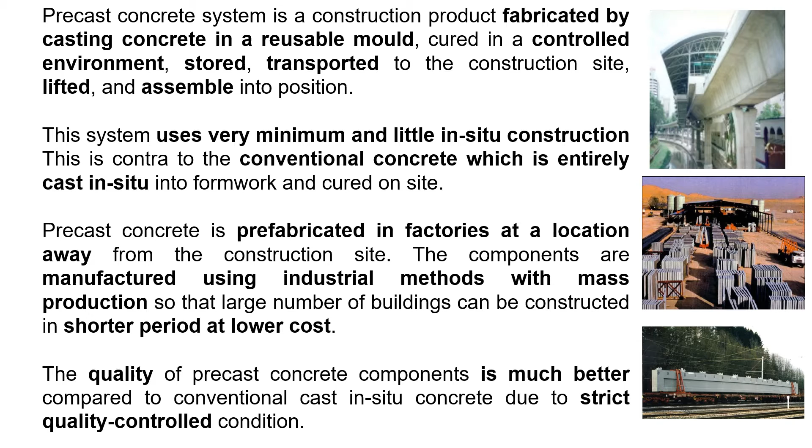Finally, the quality of precast concrete components is much better compared to conventional cast in situ concrete due to strict quality control. Because the components are fabricated at a factory, strict quality control can be imposed and applied to the product. Therefore a much better quality of product can be produced.

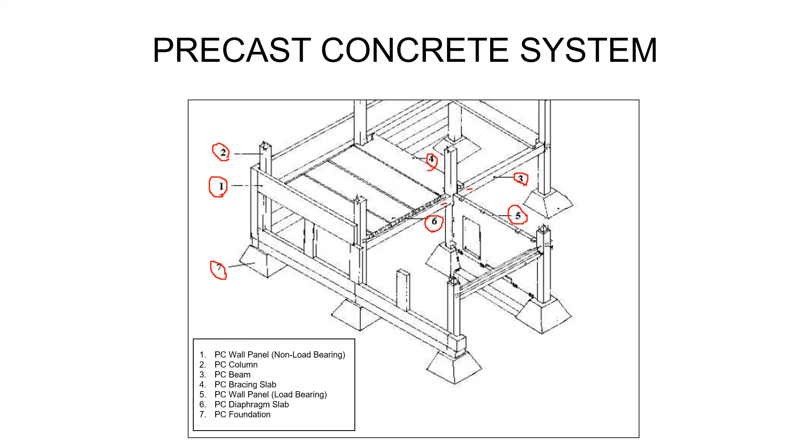Precast concrete system provides a number of advantages. Number one, precast concrete is cast off-site. The process to produce precast concrete can be done in a factory. Therefore, you don't have to bring all the raw materials to the construction site for the concreting process.

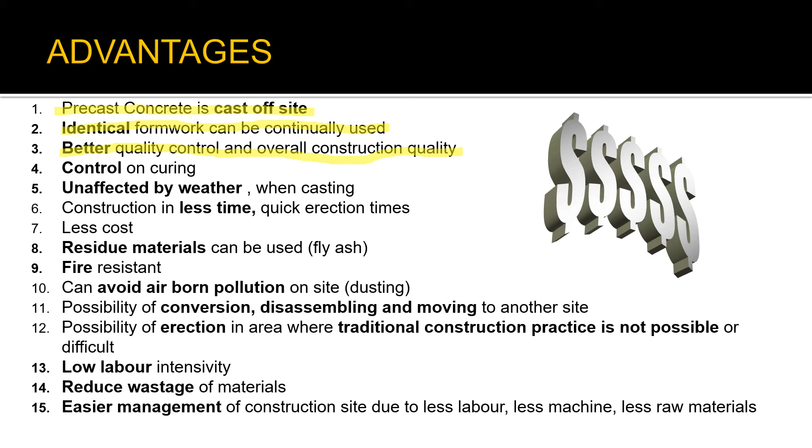Number two, identical formwork can be continually used. Because formworks are made from steel, they can be used continually as long as the condition is good. Number three, better quality control and overall construction quality. Precast concretes are normally produced in a factory, and factories have good quality control procedures, good machines, and good skilled workers, which contribute to the overall construction quality of the product.

Number four, control on curing. Because precast concretes are produced in a factory, the curing process can be controlled, such as by using autoclave machines. Autoclave machines use steam to cure the concrete. Therefore, the temperature can be controlled and the time taken for the curing process can be controlled as well.

Number five, unaffected by weather. The casting process of precast concrete is done in a factory. Therefore, it is not subjected to any climate or weather disturbance.

Number six, construction in less time. The process of casting precast concrete is done in a factory. Therefore, the only process left at the construction site is erection, and this can be done very quickly.

Number seven, less cost. Because all the production of precast concrete is done at a factory, there is less labor involved at the construction site and less wastage of materials. Number eight, residue materials can be used.

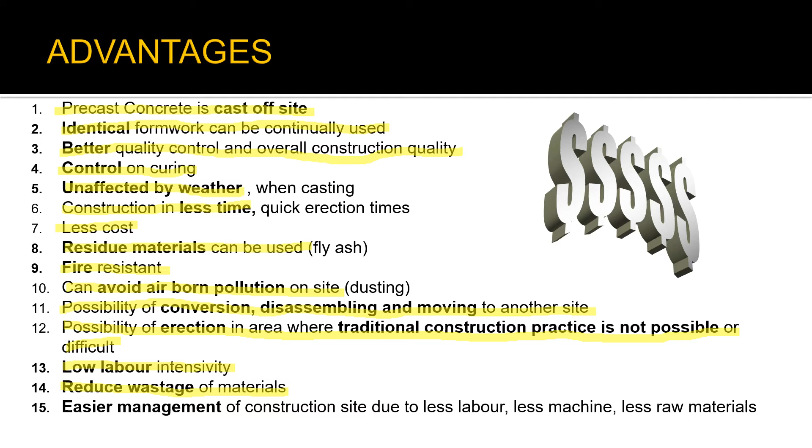Number 15, easier management of construction site due to less labor, less machine, and less raw material. The only activities that require supervision at construction sites are the erections of the components.

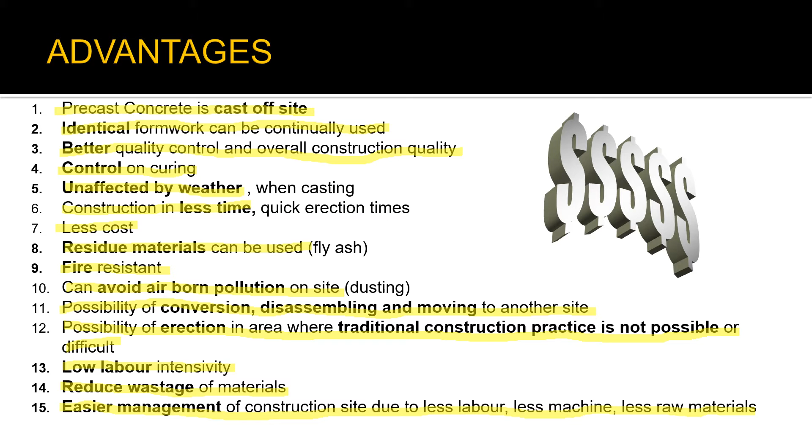However, precast concrete system comes with disadvantages. Number one, transportation is costly. This is due to the large components. For small projects, the transportation cost is going to be very high.

Number two, transportation and erection need to be designed in detail. Before producing any precast concrete, the erection methods and transportation journey need to be studied in advance.

Number three, required different site or location or storage for its production. Precast concrete system requires a dedicated location for its permanent factory or temporary factory.

Number 4, very heavy members or components. Precast concrete components, normally large in size, result in heavy weight.

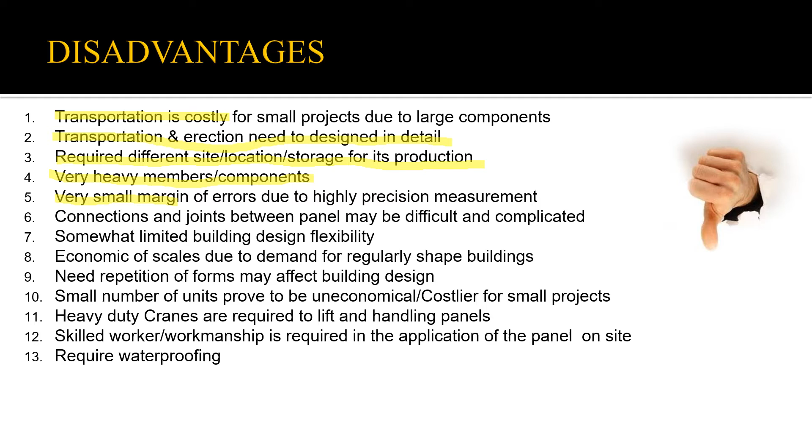Number 5, very small margin of errors due to highly precision measurement. Precast concrete system needs to be produced with highly precise measurement, otherwise it cannot fit during the installation.

Number 6, connection joints between panels may be difficult and complicated. In precast concrete system, the connections and joints are not simple. They are very complicated.

Number 7, somewhat limited building design flexibility. In precast concrete system, the shape and designs are based on the formwork, and this limits the flexibility.

Number 8, economy of scale due to demand for regularly shaped buildings. Economy of scale can only be achieved if regularly shaped buildings are used.

Number 9, need repetition of forms may affect building design. Because of the repetitive use of formworks, the building design cannot be varied.

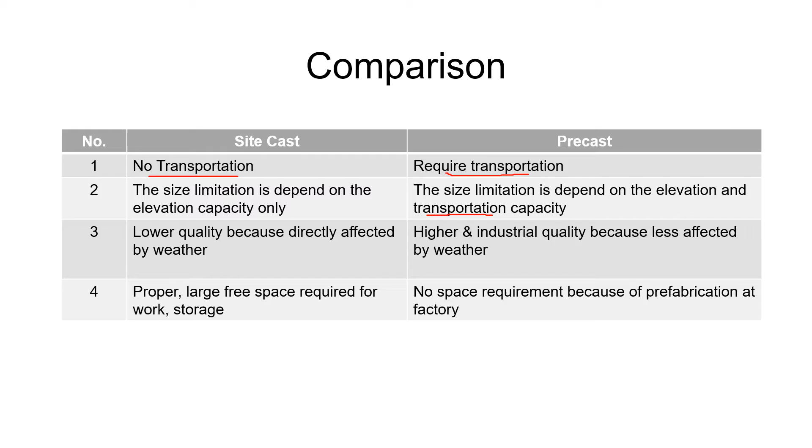The design concept of precast concrete building is based on three factors. Number one, buildability: the component shapes and design must be possible to build using the available formwork system in the factory. Number two, economic: a huge amount of capital needs to be invested to set up factories, machines and workers, therefore a large scale of project is required to ensure return on investment or profit. Number three is standardization: all components fabricated need to come in standard size to achieve buildability and economy.

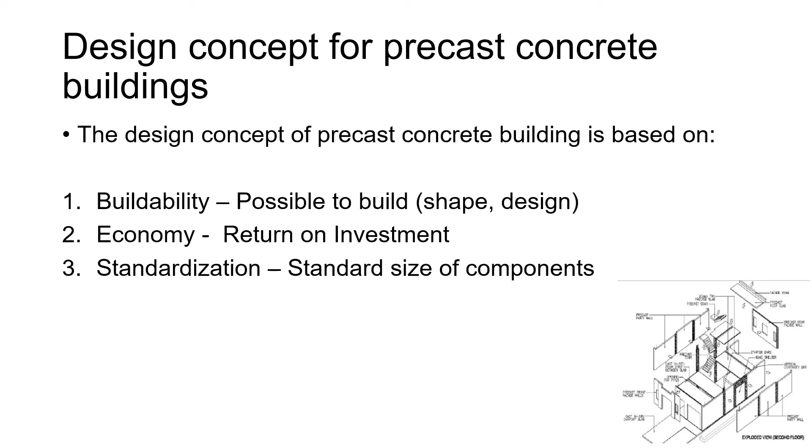Because concrete components are normally large in size and very heavy, it requires equipment and tools for handling, lifting and installing, such as mobile crane for lower story of building and tower crane for higher story of building. And those cranes must come with lifting tools such as spreader beams or wire rope slings to lift the components from the transporter to the locations.

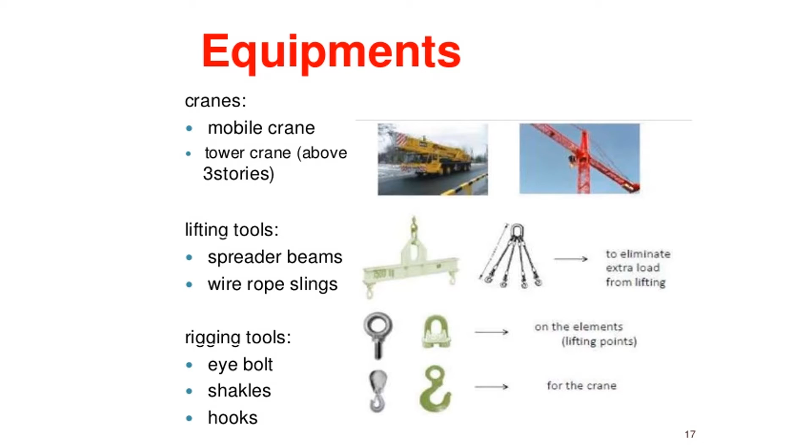And rigging tools need to be properly located within the components, such as eyebolt, shackles, and hooks. This is to facilitate the lifting and handling process.

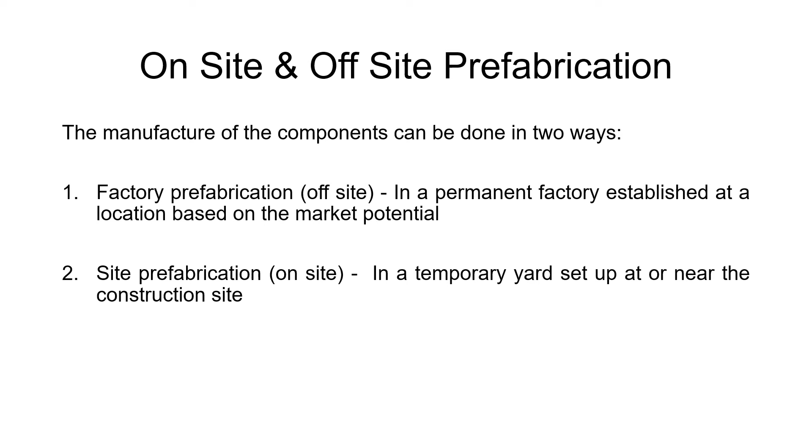The manufacturing of precast concrete components can be done in two ways. Number one is by factory prefabrication off site. This method requires a permanent factory to be set up at a location surrounded by ongoing construction projects, so the factory has the opportunity to supply all the precast concrete components and generate income. Number two is by site prefabrication on site, and this method requires a temporary yard to be set up within or near the construction site for the prefabrication process.

For factory prefabrication, standardized components can be produced on a long-term basis because the factory is permanent, and the work can be done throughout the year without interruption by climate or weather. Because of this, a high level of mechanization, or full use of machine, can be achieved.

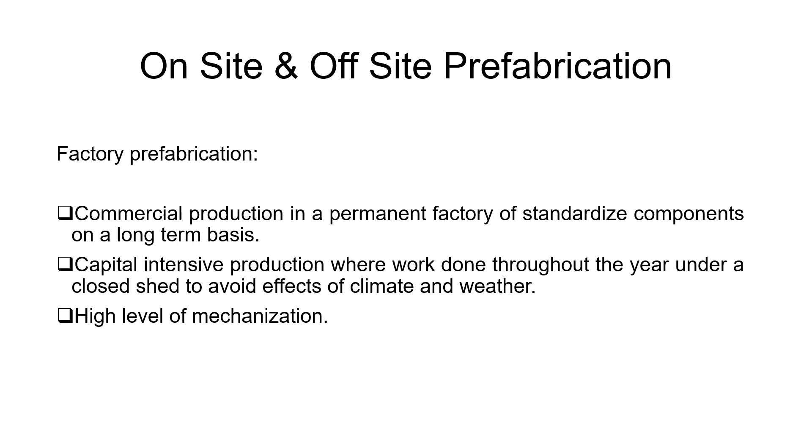For site prefabrication, it requires a temporary yard to be set up within the site, or as near as possible to the site, probably not too far. This system is used when it involves a specific job, and that job is only for a certain period of time. The execution normally consists of two methods.

First is semi-mechanized. In this method, works are carried out in open space without shed, and the labor is locally outsourced. This system also uses minor equipment and a few molds or formworks. Second is fully mechanized. This system is carried out under a fully shed or covered area, and all the labor is skilled, and the equipment is similar to the equipment used in factory production.

Precast concrete components. There are various precast concrete components available, and they can be assembled, connected and joined with one another to form a complete building or structure.

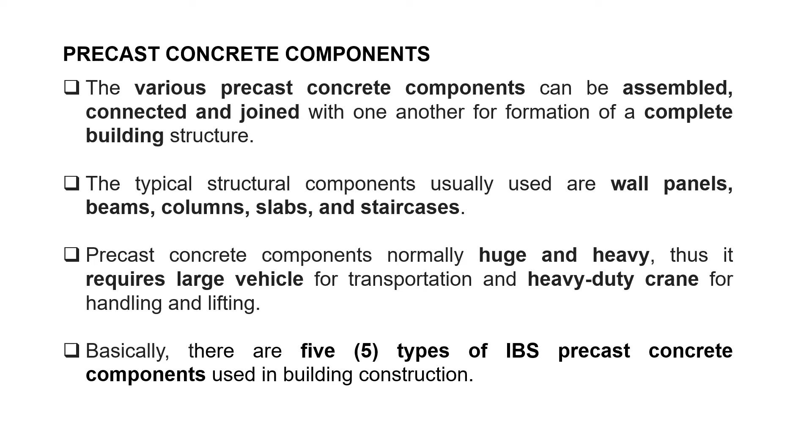Basically, there are 5 types of IBS precast concrete components. Number 1, precast concrete slab. Precast concrete slab is the horizontal structural member because it is installed in a horizontal orientation. It is normally used for floor slab and roof decks and can be designed as one-way or two-way slab.

Normally, precast concrete slabs come in half and act or function as a formwork, when cast in situ concrete is formed on the top parts of the precast concrete slab. It can also be integrated and connected with other precast or in situ components such as beams and walls.

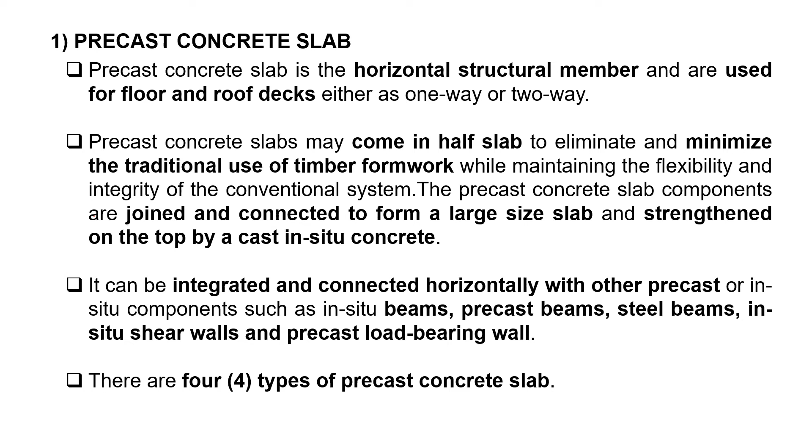There are 4 types of precast concrete slab. Number 1 is solid flat slab. Solid flat slab is fabricated as a solid object without any hole or void.

Number 2, hollow core slabs. This type of slab is fabricated with a series of voids and hollows to incorporate insulation or any utilities such as conduits and wiring. Number 3 is double T slab, which consists of two shapes of T. And number 4 is single T, which consists of one T shape.

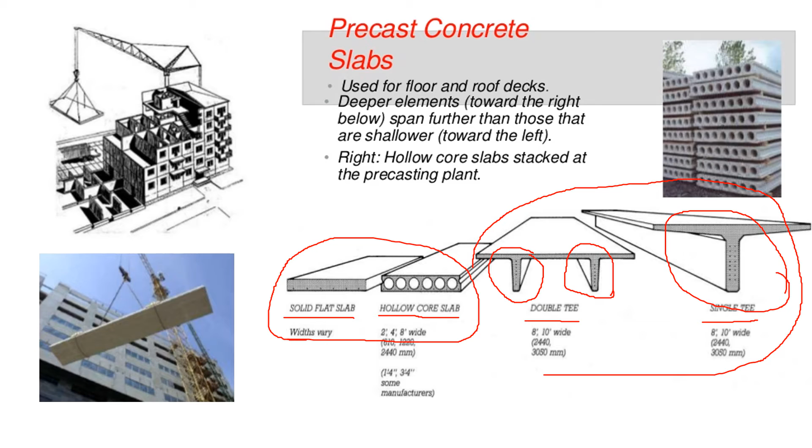Both solid flat slab and hollow core slabs are normally used for shorter span slabs. However, double T and single T are normally used for long span slabs, but with more thickness.

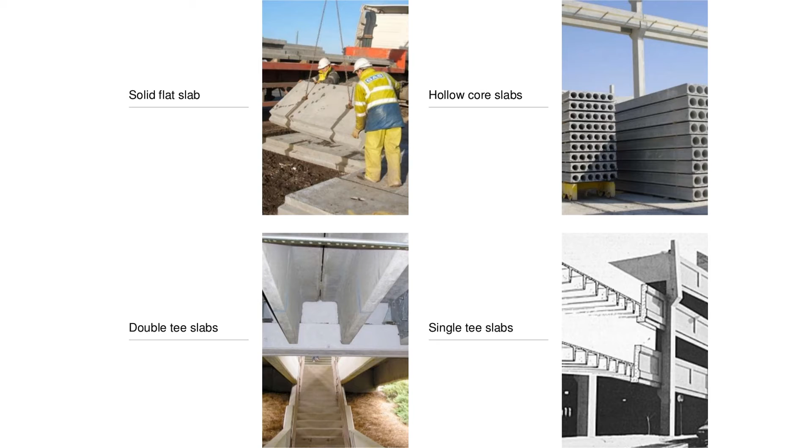These are the examples of solid flat slabs, hollow core slabs, double T slabs, and single T slabs.

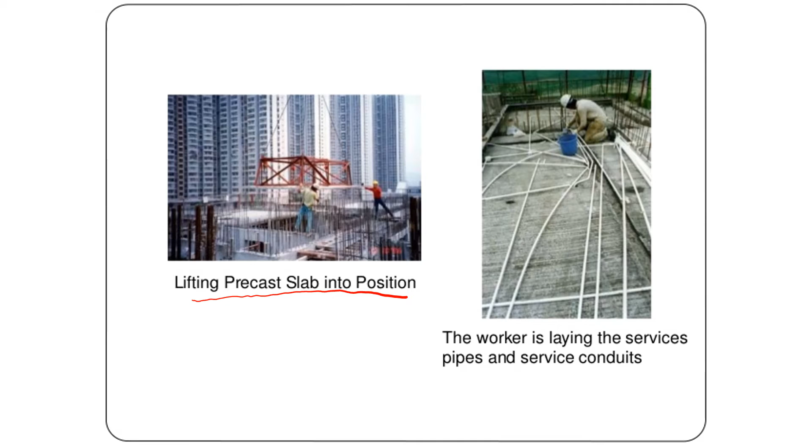This is an example of the lifting process of a precast concrete floor slab into its position, and another photo here showing a worker laying service pipes and service conduits on the precast concrete floor slab after it was installed, prior to receiving cast in situ slab on top of the precast concrete slab.

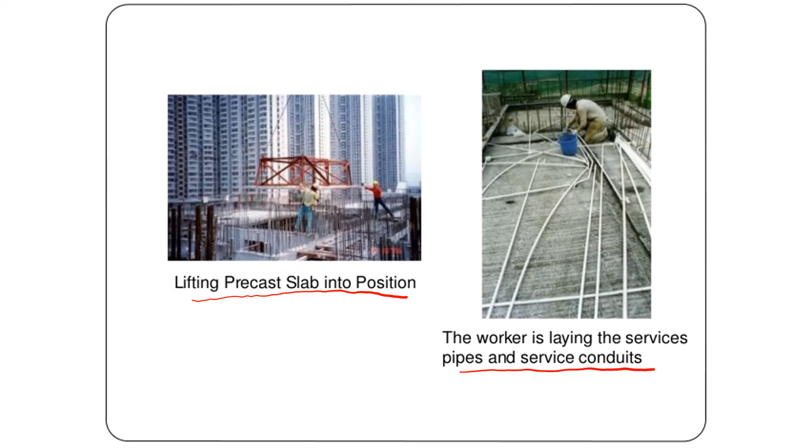Before any precast concrete slab system is selected, there are factors to be considered. Number one, maximum span. If a shorter span is required, perhaps solid flat slab and hollow core slabs are more suitable. If a longer span is needed, double T and single T slabs are more appropriate.

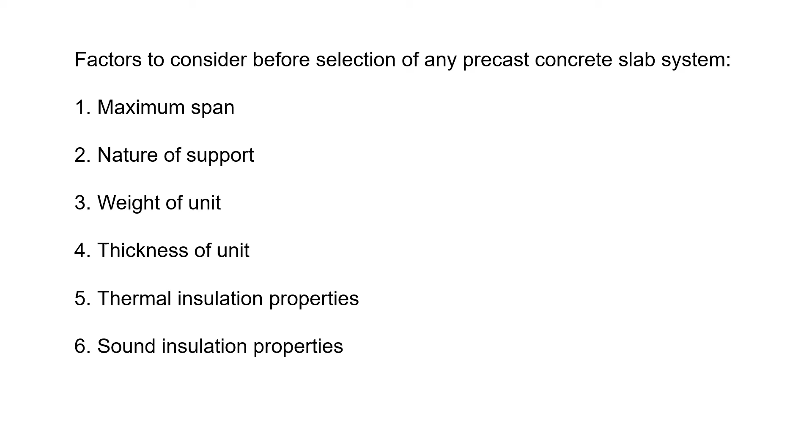If less thickness slab is required by the project, maybe double T or single T slabs are more appropriate. Number 5 is thermal insulation, and number 6 is sound insulation. If the project requires insulation to be incorporated in the floor slabs, perhaps the more appropriate system is hollow core slabs.

Number 2, precast concrete beam. Precast concrete beam is the horizontal structural member to carry flexural and shear loads, and also provide support for floor slabs, and can be made in various sizes depending on the required design and specification.

For internal beam, the cross section is symmetrical - this is to support the floor slab on both edges and sides of the beam. For external beam, the shape is asymmetrical because only one side is required to support floor slabs.

Precast concrete beams come in four normal standard shapes: rectangular, L-shaped, inverted T, and AASHTO.

Precast concrete beam is normally fabricated in standard size. This is to minimize costs and accelerate the manufacturing process.

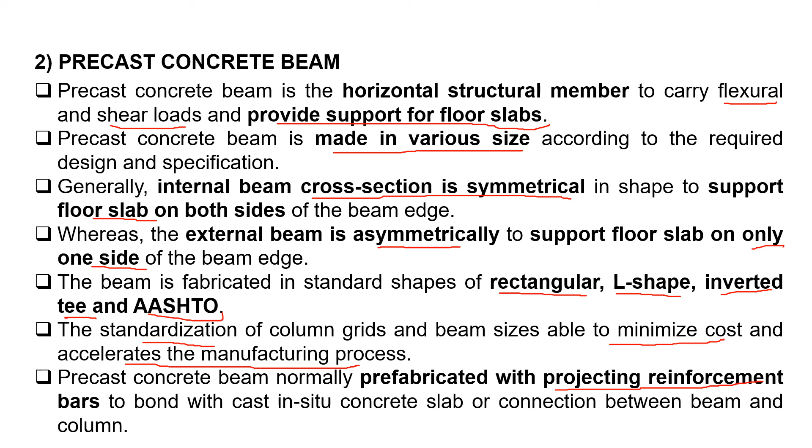Precast concrete beams provide support for slab as previously mentioned, and the precast concrete beam is provided with projecting reinforcement bar that will bond with other components. This is the examples of the projecting reinforcing bar.

And this is the four standard shapes of precast concrete beam. This is the rectangular beam. This is L-shaped beam. This is inverted T beam. This is AASHTO beam, and this is the examples of how AASHTO beams look like.

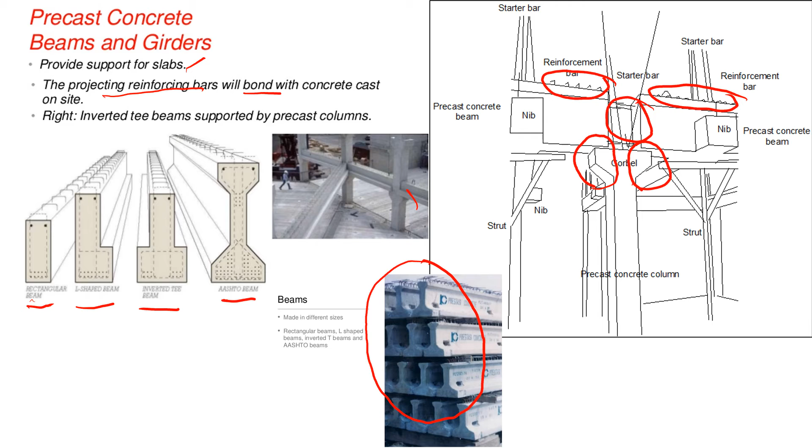The beams are supported by concrete column with connections called corbel. This is how precast concrete column supports precast concrete beam by using a connection called corbel. This is examples of corbel.

Sometimes AASHTO beam is incorporated with pre-stressing technology. This is how the reinforcement bar is arranged in AASHTO beam, in which can be seen here the main bar is located at the top parts of the beam and the bottom parts of the beam.

This is because compressions occur at the top parts and tensions occur at the lower part. Therefore, by incorporating pre-stressing technique to both parts of reinforcement bar, this could increase the strength of the beam.

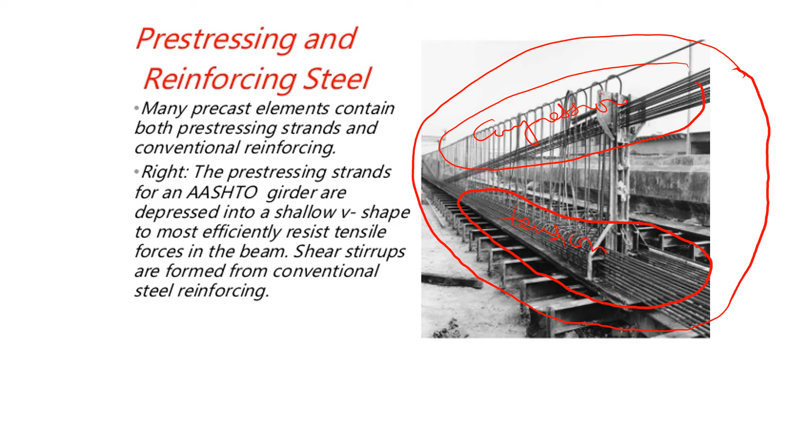Number 3 is precast concrete column. Precast concrete column is the vertical structural member used to provide support for beams. And precast concrete column usually carries axial loads or vertical loads, and is designed and manufactured either in single or double story height for the purpose of easy handling and transportation.

Columns higher or longer than single or double story may face difficulties during transportation using trailer and lifting using a crane. And the columns, even though manufactured in single or double story height, can be assembled to one another to achieve the required heights.

If a 15-story building is about to be constructed and the precast column is fabricated in a single story height, therefore the column can be connected to one another until the height is achieved.

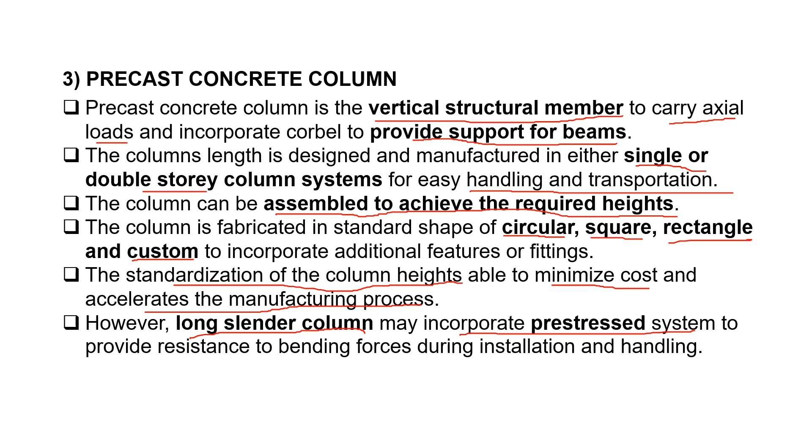However, if there is a long slender column that needs to be constructed, it may incorporate a pre-stress system in the reinforcement bar to provide more resistance to bending during installation and handling. This is the examples of precast concrete column.

During installation, push-pull prop is required as a temporary support to provide stability to the column during installation.

This is samples of detailed connections column to footing. This is the pad footing. This is the pile, and this is the precast concrete column.

So the main bar, the starter bar from pad footing, will be inserted in the hole at the bottom of the column. Then after that, a concrete grout or cement mortar will be injected into this hole to provide stiffness or strength to the connection.

This is where the grout hole is located for mortar injection or grout injection. This is examples of the higher precast concrete column.

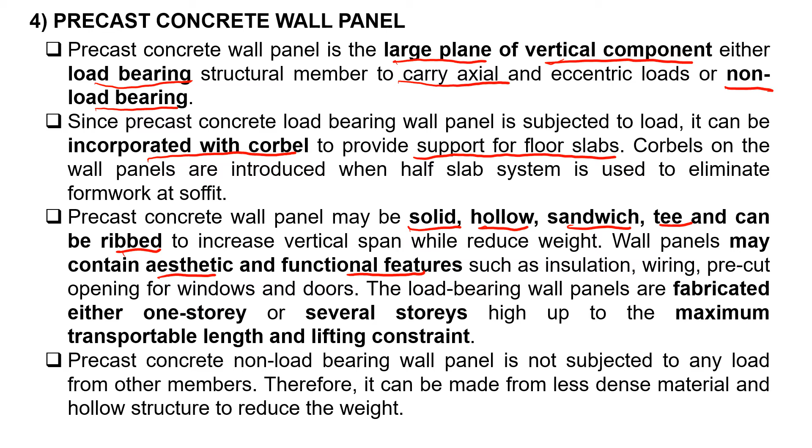Precast concrete wall panel may be fabricated as solid, hollow, sandwich, T, and rib, and may contain aesthetic and functional features during fabrication, such as insulation, wiring, windows and doors.

The wall panels can be fabricated to either one-story heights or several-story heights, as long as it does not exceed the limitations, maximums of transportable length and lifting constraints.

However, for precast concrete non-load bearing wall, it is not subjected to any load from any members. Therefore, it can be made less dense to reduce the weight.

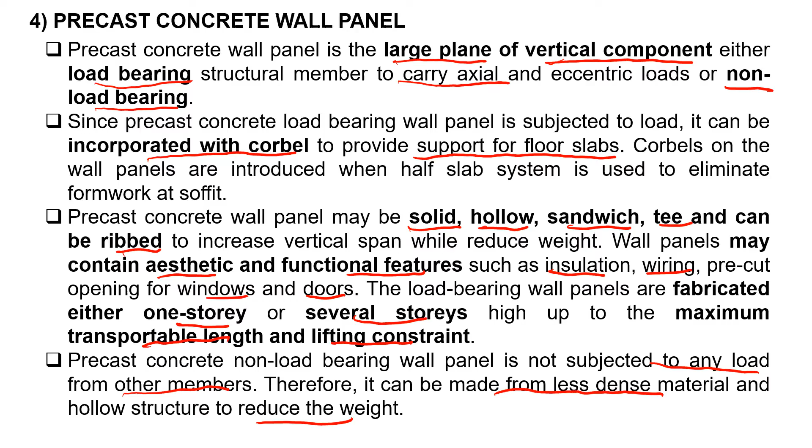This is examples of the precast concrete wall panels. As you can see here, wall panel can be fabricated up to several story height, as long as it does not exceed the limitations for transportable length and lifting capacity.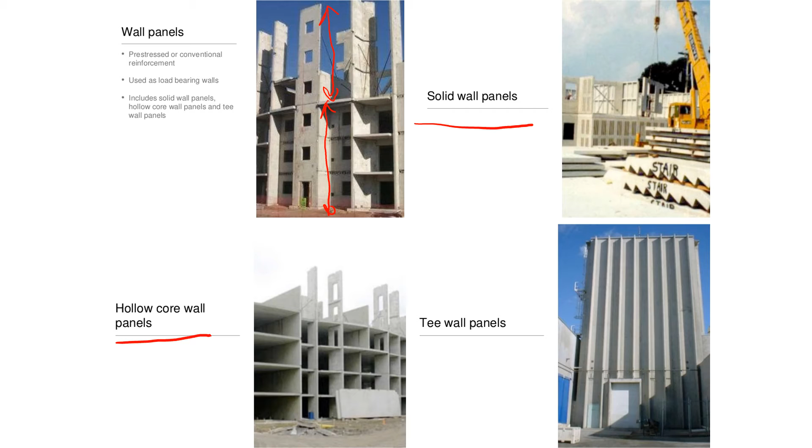This is the solid wall panel. This is the hollow core wall panels, and this is the T wall panels.

This is wall panels supported by temporary bracings. You can see here that the large size of panels is fabricated and installed, and this is how the panel is lifted by the cranes for installations.

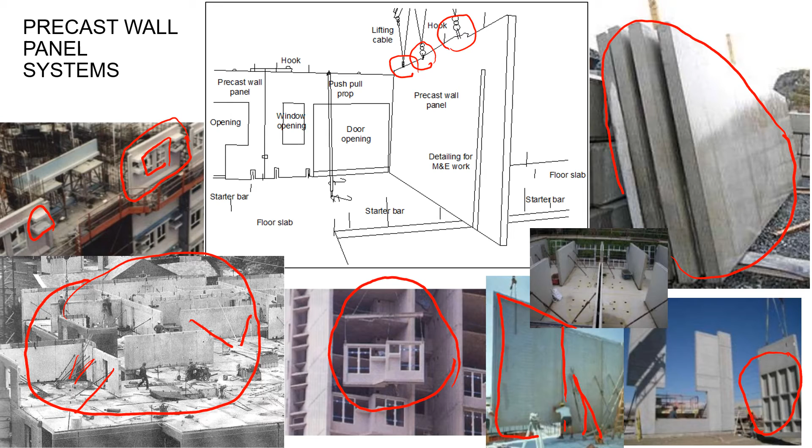The wall panel must be incorporated with hooks for the crane to lift the panel safely, and push and pull props are required as temporary bracing to support the wall panel during the installations.

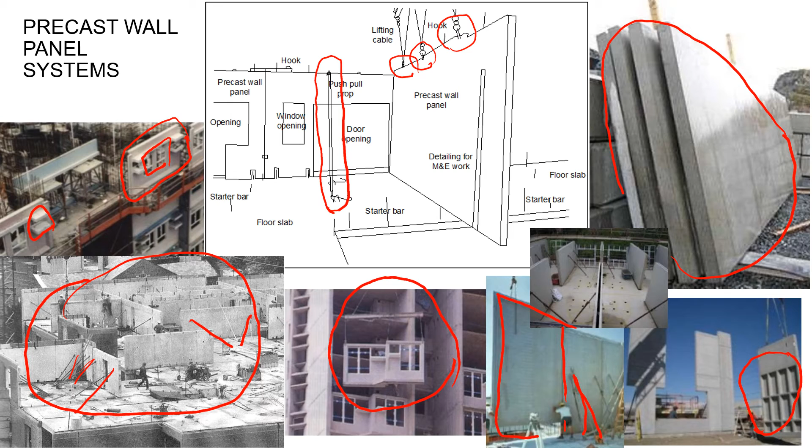In this example, you can see push and pull prop is used to provide support and stability to the precast concrete wall panel during installations.

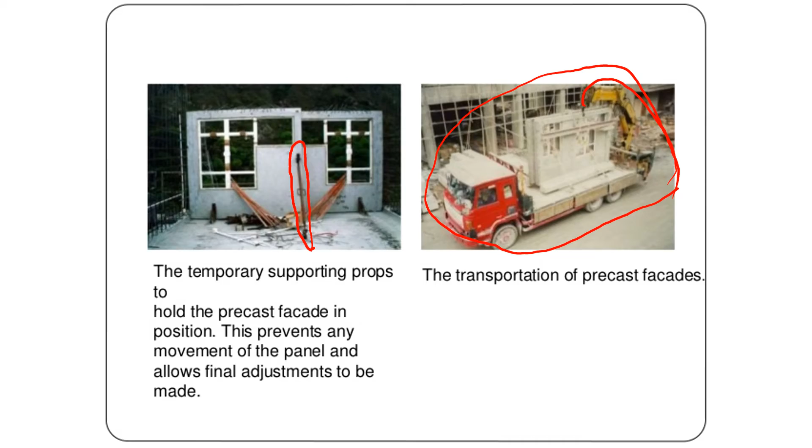Number 5, precast concrete staircase. Precast concrete staircase is an elevated structure member connected from the lower floor level to upper floor level, and can be manufactured with or without landing slab, and projecting steel is provided at the staircase for connections between landing and other components.

Smooth and quality finish can be produced because of the formworks capable of producing such smooth finish, and it was the standardization of the size, the width, the rise, the treads that makes the production economical.

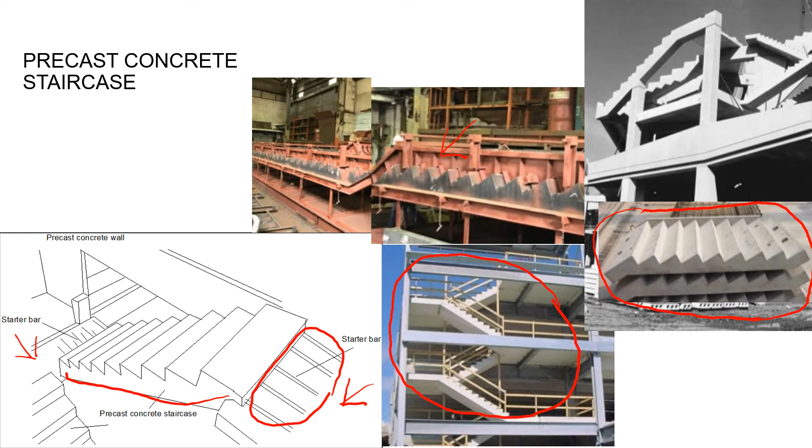Assembly concept for precast concrete building: one component is supported by other precast concrete components.

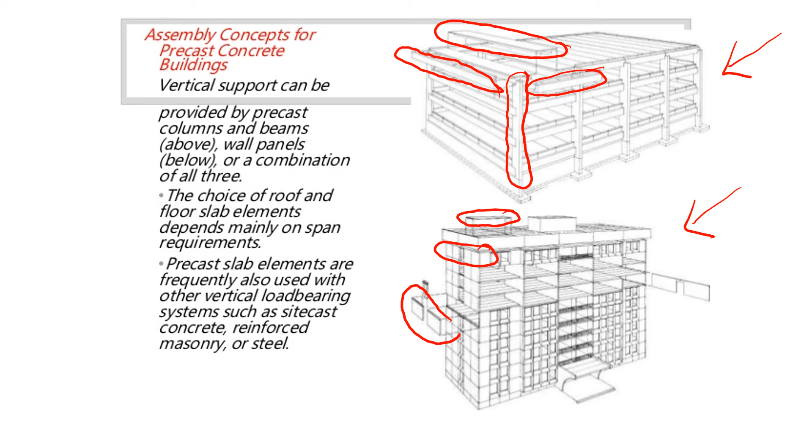This is the close-up look showing that the double T floor slab is supported by beams and column.

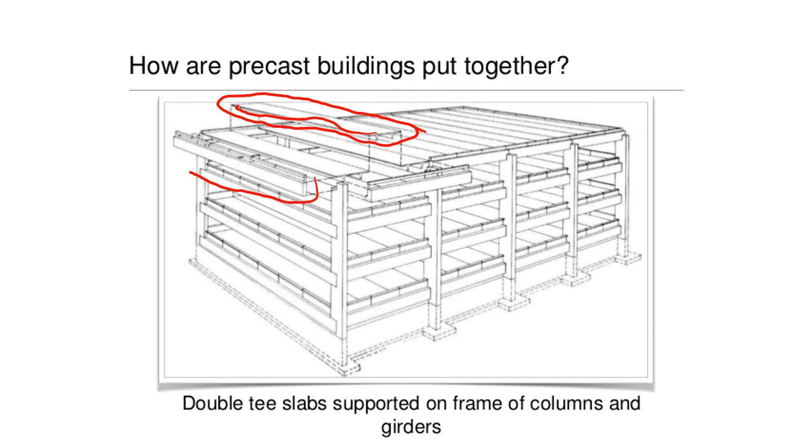This part of floor slab is supported by the precast concrete beams, and the precast concrete beams here is supported by the neat connections of precast concrete columns.

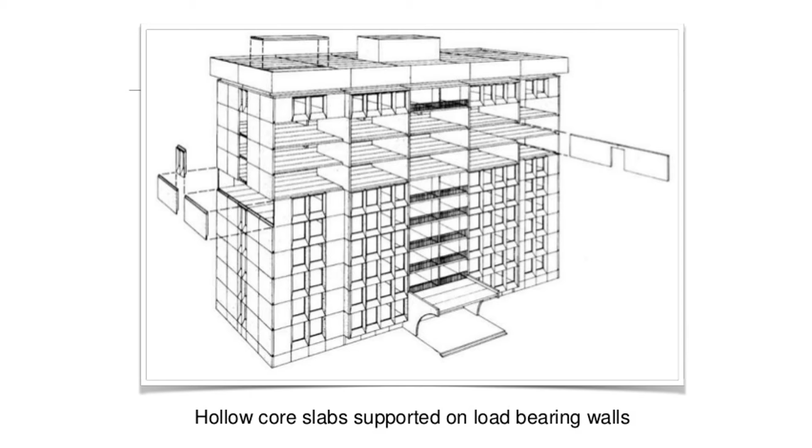This is the close-up photo showing that the hollow core slabs is supported on the load-bearing precast concrete wall panel. This is the precast concrete wall panel, and this is the hollow core slabs.

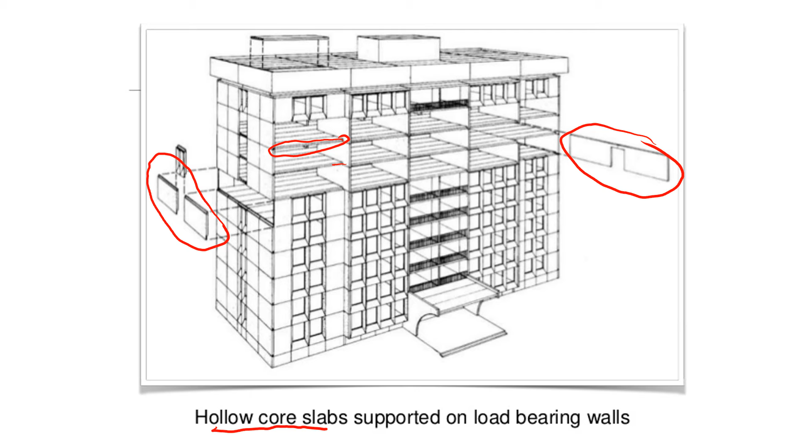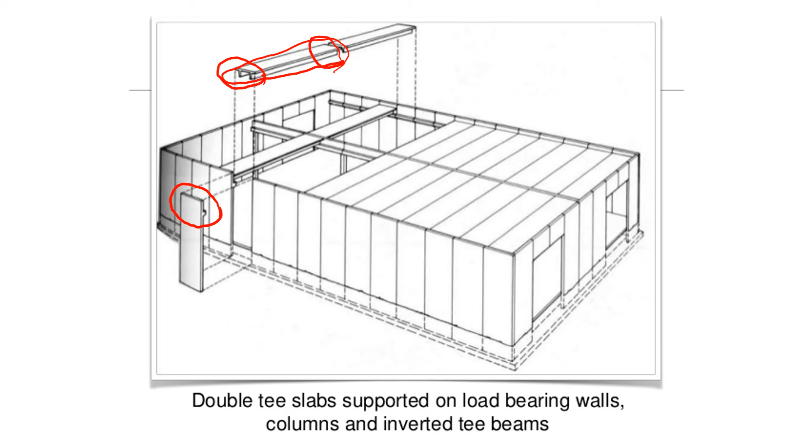This close-up photo shows a precast concrete double T slab supported on precast concrete load-bearing walls and inverted T beams. One edge of the slab is supported by corbel connections from the precast concrete wall panel load-bearing, and the other edge is supported by corbel from inverted T beams. This is the inverted T beams.

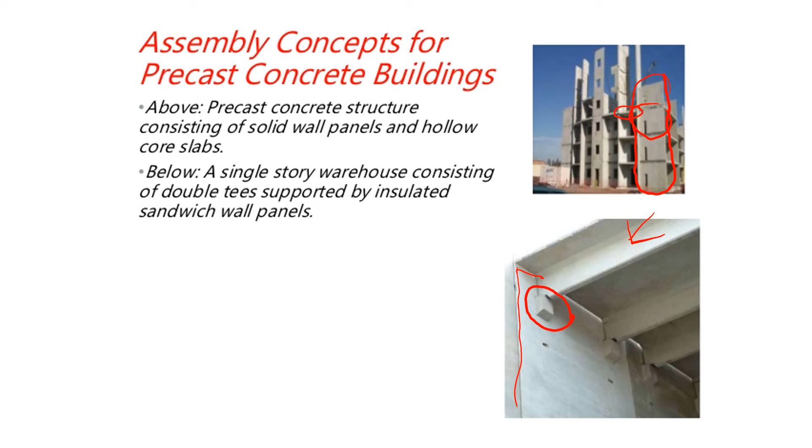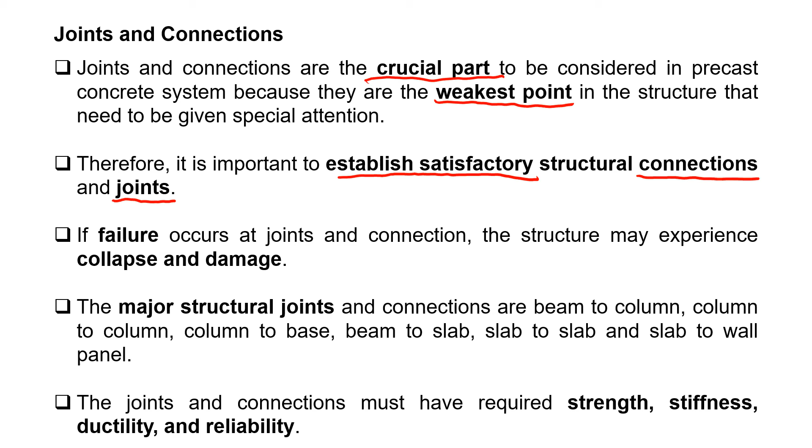Joints and connections are the most crucial parts to be considered because they are the weakest point in the structure that needs special attention. Therefore, it is important to establish satisfactory structural connections and joints, because if failure occurs at the joint, the structure may collapse and be damaged.

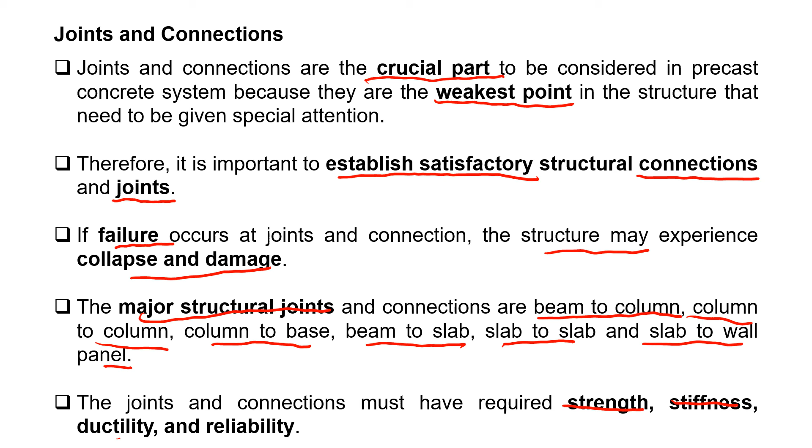The major structural joints for precast concrete systems are beam to column, column to column, column to base, beam to slab, slab to slab, and slab to wall panel. The joints and connections must have required strength, stiffness, ductility, and reliability to ensure stability.

There are three types of joints normally used for precast concrete components. Number one is called compressive joint. This type of joint uses cement mortar to resist compressive force between vertically jointed precast components.

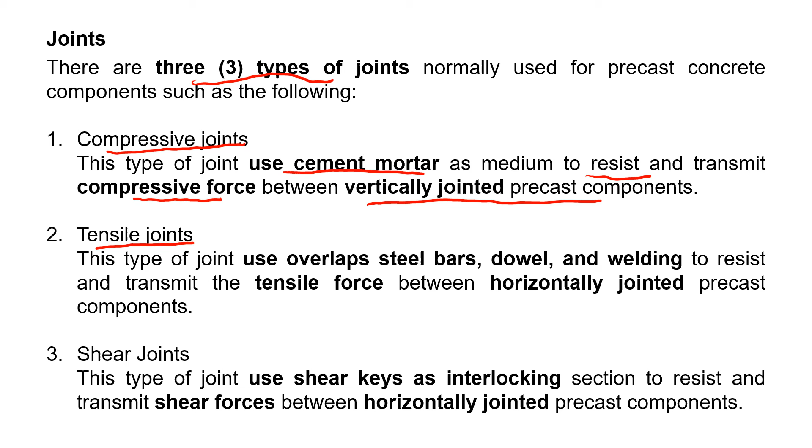Number two is called tensile joints. This type of joint uses overlap steel bars, dowels, and welding to resist tensile forces between horizontally jointed precast components. Number three is called shear joint, which uses shear keys as interlocking to resist shear forces between horizontally joined precast components.

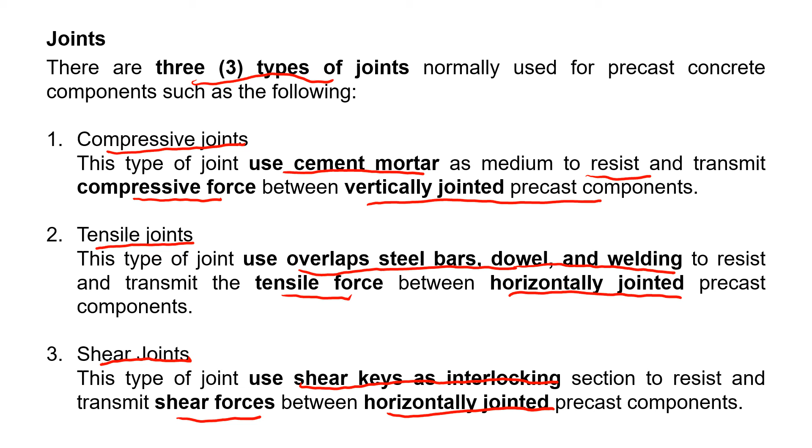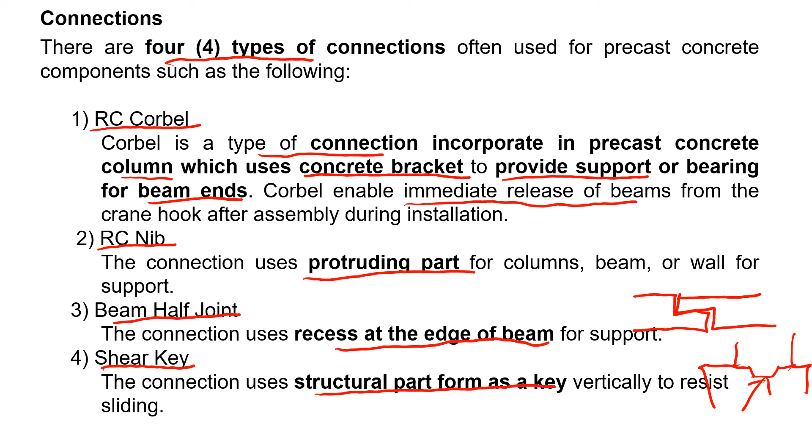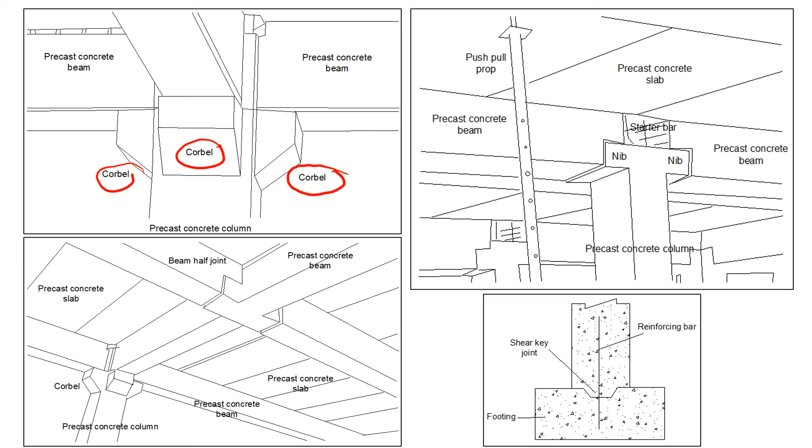This diagram shows examples of joints and connections. This is RC, reinforced concrete corbel, used to support precast concrete beams. Normally, reinforced concrete corbel is used in precast concrete columns.

Secondly is reinforced concrete nibs, also used to support other precast concrete components such as precast concrete beams. This is beam half joint.

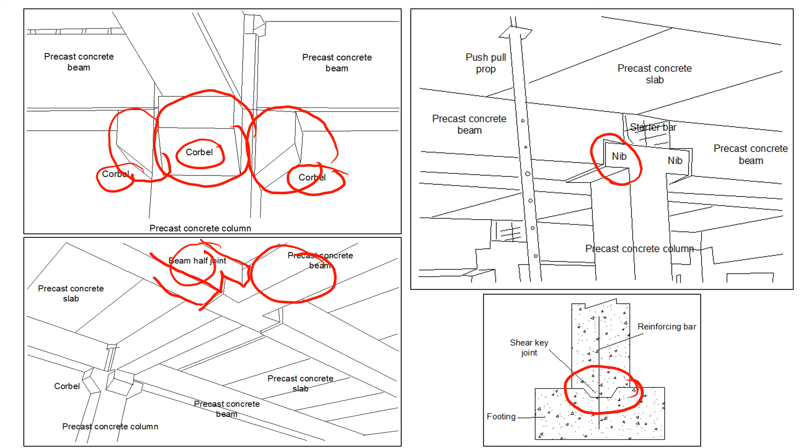This connection is used for connections between one beam and another beam. And finally, shear key joints, used to prevent sliding movement.

This is an example of slab to slab connections. This is one component of slab, and this is another component jointed together, and sealant is used to cover the gap between the two slab components. A plate is used to tie between the two slabs, and the plate is strengthened by using a bolt.

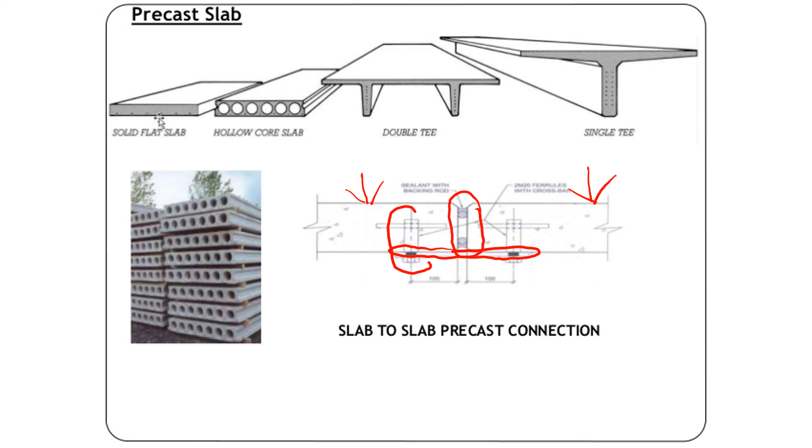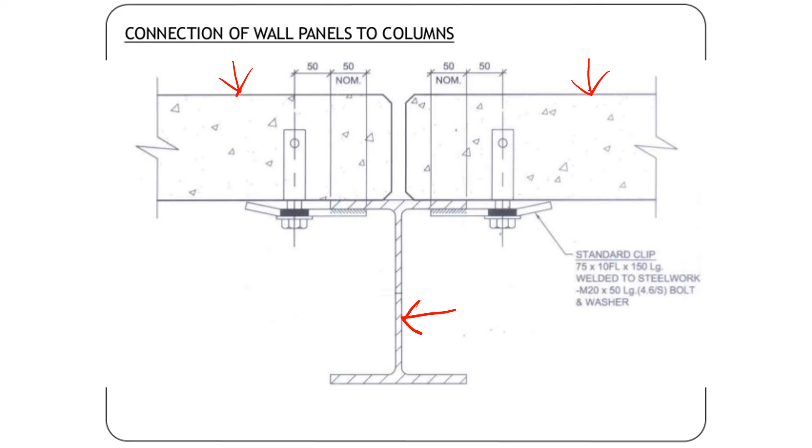This is an example of connection between wall panels and column. This is wall panel 1, this is wall panel 2, and this is the steel column. The connection uses standard clips, which are welded to the steel column, and a bolt is used to connect between the clips and the wall panel. The gap between wall panels can later be filled with grout or cement mortar.

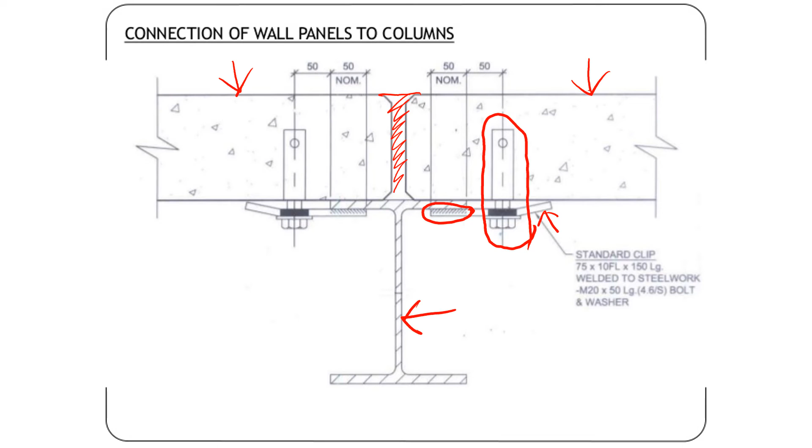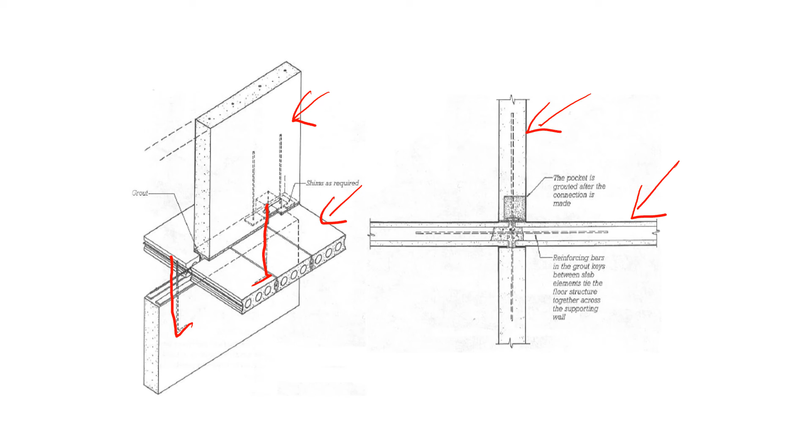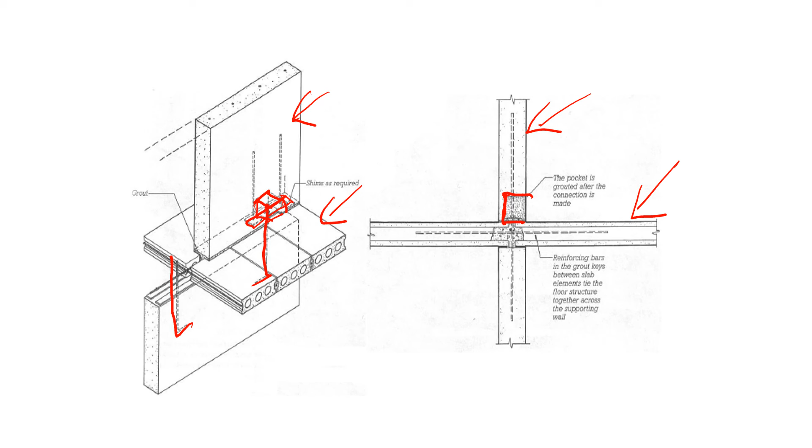This is an example of connection between precast concrete floor slab and precast concrete wall panels, whereby a projecting starter bar coming out from the bottom wall panel is used to connect to the upper wall panel through the precast concrete slabs using steel plates. There are holes here called pockets that will be filled in with grout after the connection between the steel bar is secured, and the gaps between the slabs and the wall panel will be filled with mortar or grout.

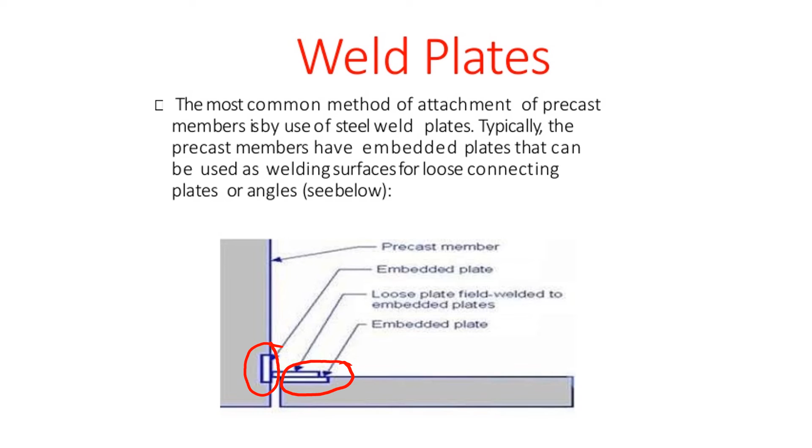Another common method of attachment between precast concrete members is by using steel plates embedded in the component, such as this for the wall panel and this for the concrete floor slab. These two steel plates are welded to provide a strong connection.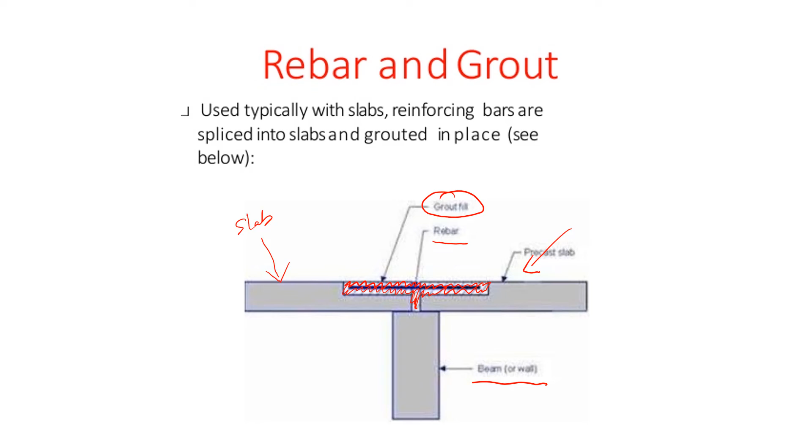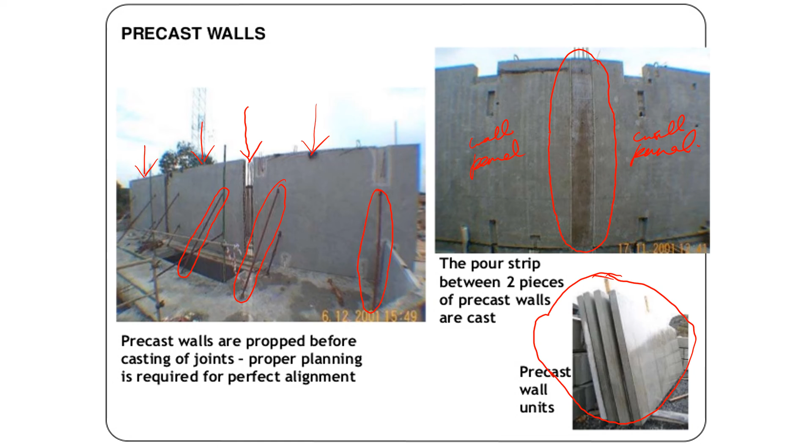This is an example of precast wall panels during the construction process. This is the wall components, supported by temporary struts to allow the wall panel to stand stable. Later, the gap between the wall panels will be cast using in-situ construction. This is the column cast by in-situ construction to connect this wall panel to another. This is the wall panel waiting to be installed, stacked together before being lifted for assembly.

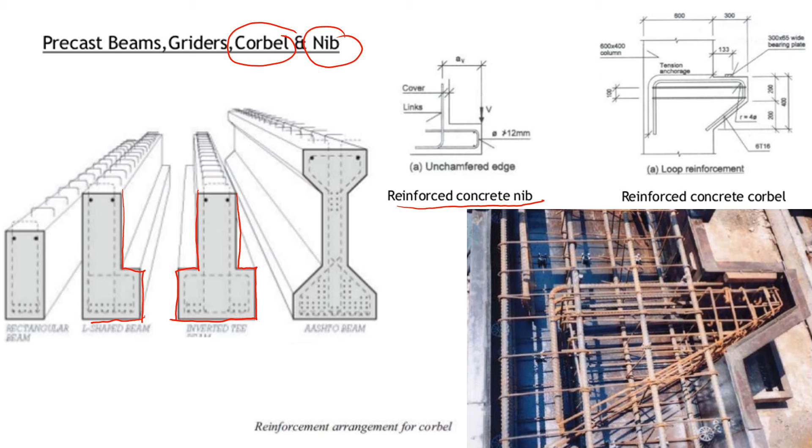This is the connection system for precast concrete beams using corbel and nib. The precast concrete beam is fabricated with this kind of shape to allow connections with other beams. This is an example of a nib. The nib has a connection called an unchamfered edge, whereby this part is where another beam is going to be joined, in this position.

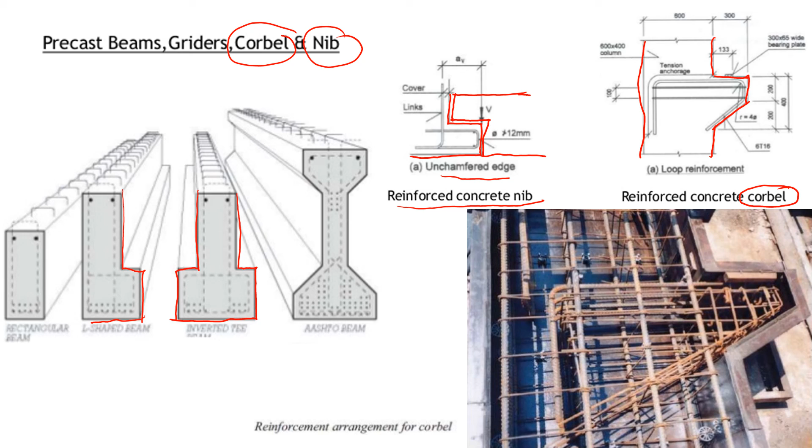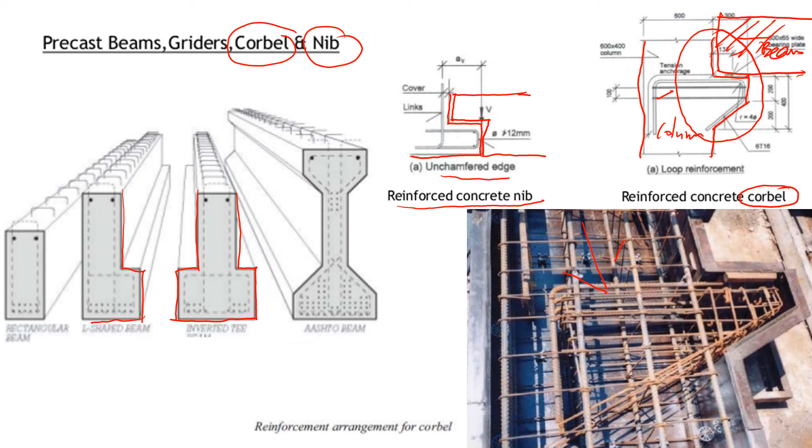This is a corbel connection, corbel system, whereby the beam will have this part protruding from the original column, and this corbel is the location or position in which other beams will be connected. This is beam, this is column. So the beam and column are connected using what they call the corbel system. This is how the reinforcement bar is installed to form the corbel system.

This is the connection system for slab to beam. In these examples, this is the slab, connected to the precast concrete beam. A weld plate connection is used to connect or join the slab and beam, and reinforcement bars are installed in this position, going through the holes in the precast concrete column prepared earlier. Therefore, the slab, precast concrete beam and precast concrete columns will be connected using in-situ construction in this location.

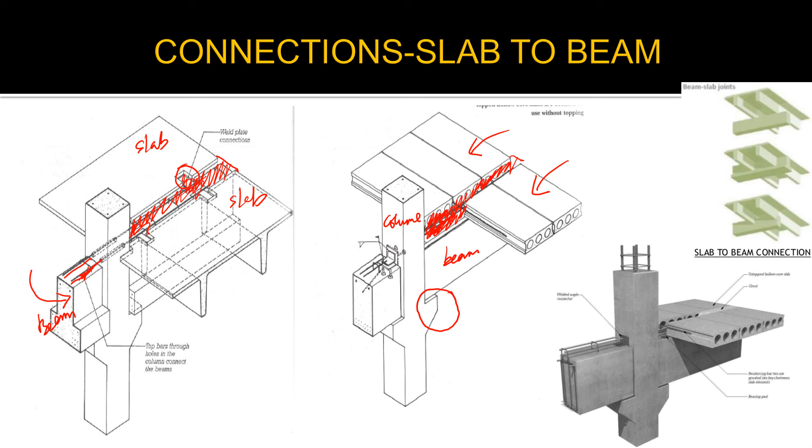These are examples of precast hollow slabs connected to precast concrete beam and precast concrete column. You can see the corbel system here used to connect the beam and precast columns. Later, slabs, beam and columns are jointed together using in-situ construction in the spaces between them. This is another view of the precast concrete slab, beam and column connection.

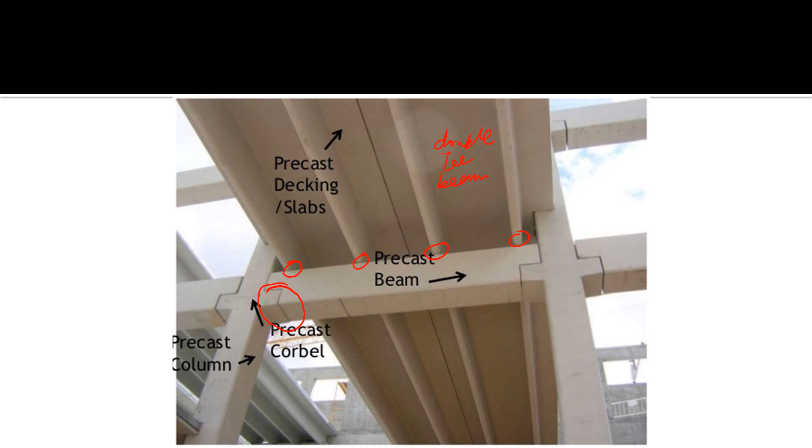This is the double-T concrete beam, supported at these positions on the precast concrete beam, and the beam is supported by the column using precast corbel systems here and here.

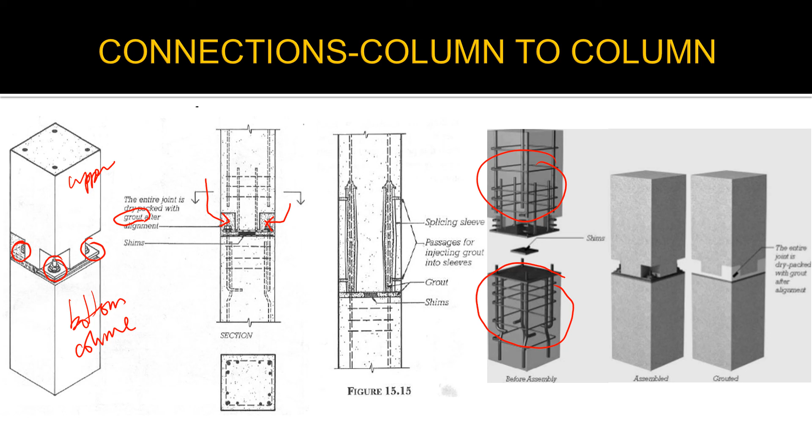This is an example of a connection system used for column to column. This is the upper column, this is the bottom column, later connected using this bolt and nut, prepared earlier in the factory and connected at the construction site. Later the empty space here is grouted to establish a secure connection. This is how the reinforcement bars are arranged at the edge of the connection.

This is the connection for wall to slab. As you can see, the precast concrete slab is jointed or connected to the precast wall panel using a corbel system.

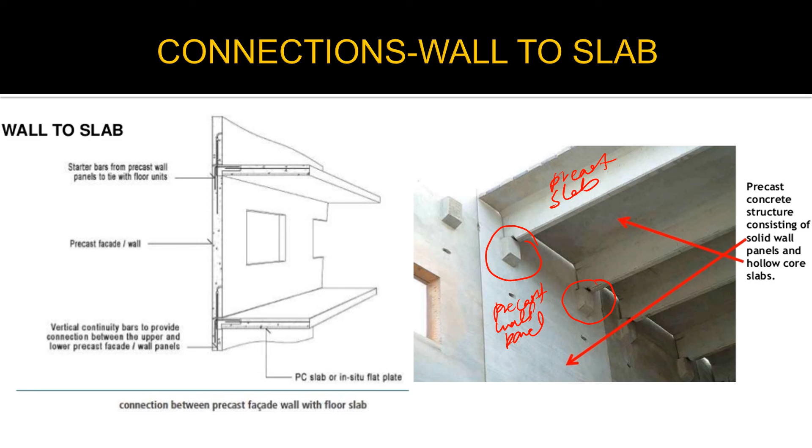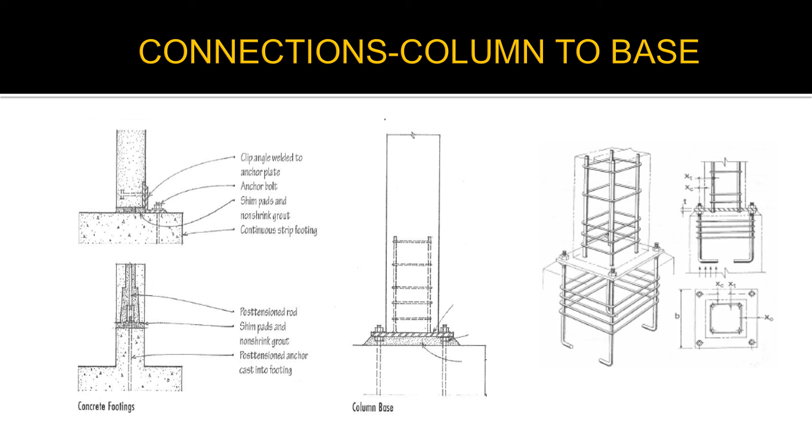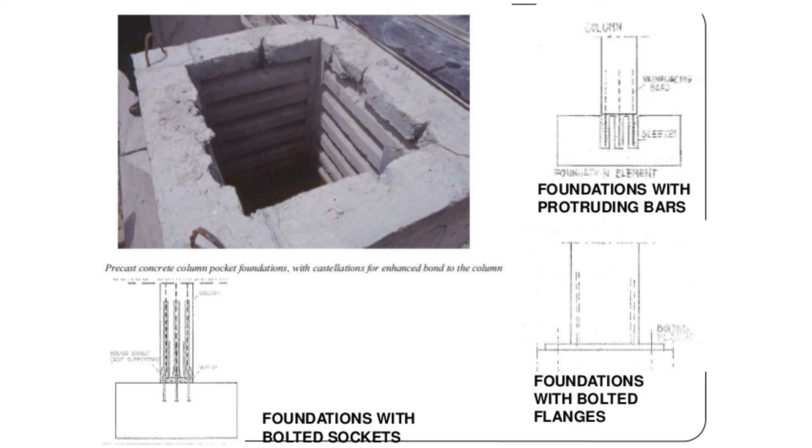This is an example of connection systems for precast concrete column to precast concrete base. This is another type of connection system between precast concrete column and precast concrete foundation or base.

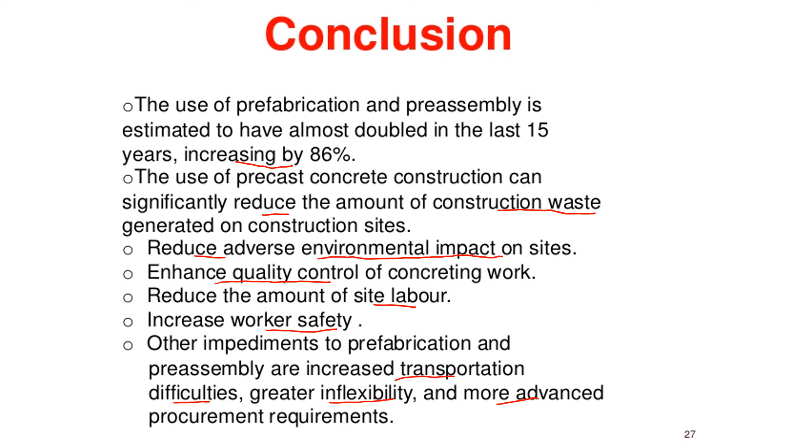In conclusion, the use of precast concrete systems shows increase year by year. Precast concrete construction is able to reduce construction waste, reduce the impact on the environment, enhance quality control of concrete, reduce direct labor on site, and increase safety for workers. However, the hurdles or impediments of applying precast concrete systems include transportation difficulties, inflexibility, and the requirement for more advanced procurement.